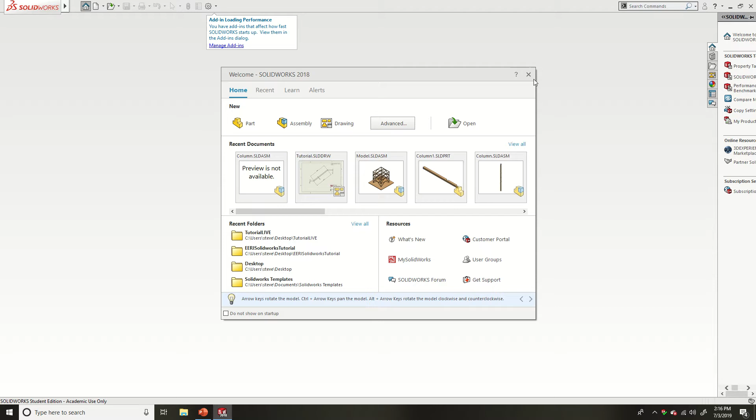So right now, I'm gonna put the column parts together and name it as one assembly. Later on, once you start putting the full model together, you can just call out that one assembly and throw it in, throw it in, throw it in.

So for this one, let's go ahead and close this because we have our template. You can either open it from the folder or open it from here. Alright, it's a template, it's gonna open up. You've got your IPS right here, inches pounds seconds, I believe.

Alright, so first off you gotta save it, save it for how you're gonna want it. So this is gonna be a column, we're gonna save it as column. File name is column. Make sure you go from assembly templates to assembly. Once you've done that, go ahead, click save.

There it is. One thing to know is that once you open an assembly, you want to start putting parts in, right? So what are we going to put? We're going to go up here, top left in the ribbon. The ribbon's going to have insert components.

You're going to have the option, either this open dialog box is going to open up, and if it doesn't, you can just click browse over here. We're going to go to our folders, correct folder, and open column 1. That column 1 was the bottom one. So we're just going to open that, and basically you can select where you want it.

So if I click in the center of the screen, it's going to throw it in there. One thing to note is that once you throw this part in, SolidWorks is actually going to fix it. So if I were to click this component and right click, it's actually fixed, meaning that if you want to move it, you can't.

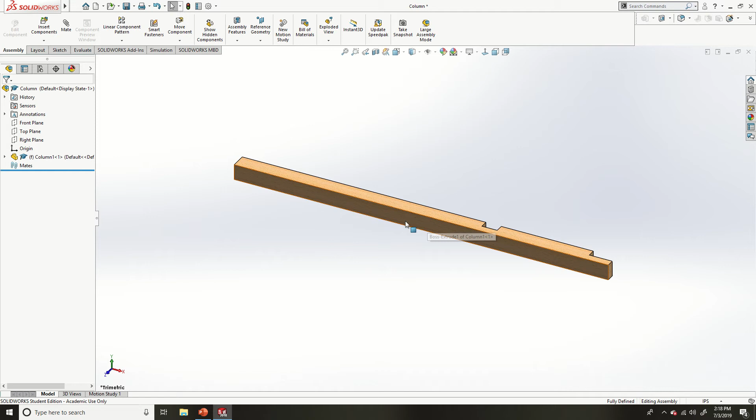So one thing to do, since it's fixed, is unfix it. But in this case, you actually want to make it float. So I'm going to click the component, right click, and go to float. And now that I've floated it, I can actually move this around.

So I want to position this in the space in such a way that it's easier for me to work with. In that case, I want it to be standing up, and I want these notches to be facing me so I can see them. So one way to do that is, let's go ahead and just click it.

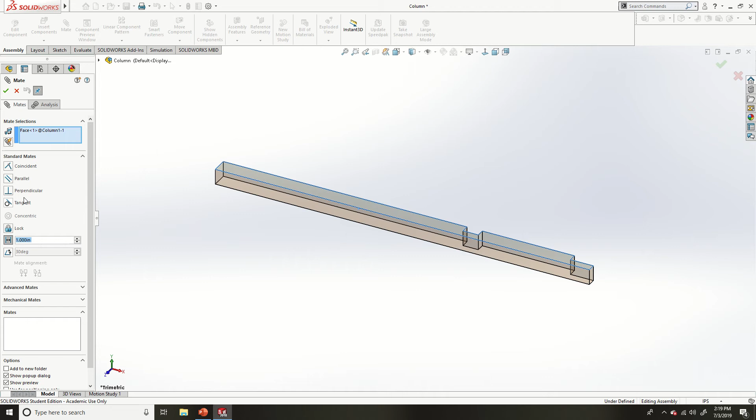How do you do this? You want to mate, that's what's known as in SolidWorks, it's called mate. So with your mate option, you basically gonna do coincident for the most part, or you could do a fixed one for a particular distance, parallel, perpendicular, tangent. For this one, we want to mate it to the right plane.

I'm gonna try to get this to stand up. Hopefully I can get it on the first shot. Alright, I did, but as you can see, I'm gonna press Control 7, ISO view — it's on the right plane, but it isn't in the way I like it.

So let's go back to our navigation pane, and I want to delete it. If I delete this mate, it's actually going to keep the same orientation it had previously with the mate, but it's just going to remove the rule. So it's going to be standing up. But I don't want it like that, so let's do a little trick.

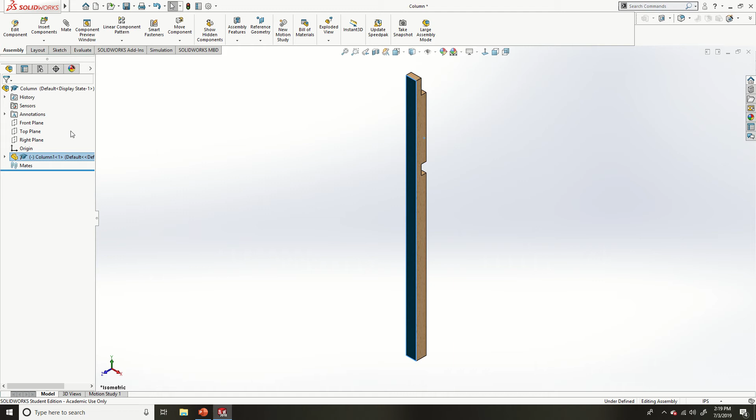Before I do that, let me make the bottom of this — I'm going to click that, and then control-click the top plane. See, SolidWorks recognizes that you want to do a mate, so it's actually going to leave you the option right here. This is actually the one for coincident. I'm going to mate it. So right there, let me show you this.

So there it is, it's being shown right here on the bottom. Here, just show, hide. So there's your top plane. It's right there and it's mated.

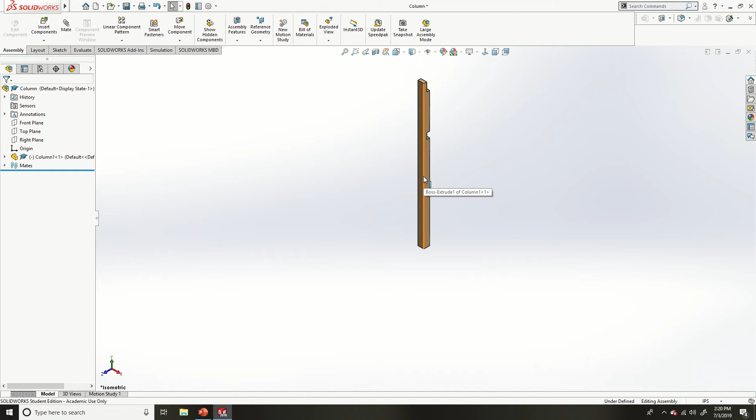But I want it to be facing me. So one way to do it, if you're going to rotate this, is pick this line right here, and this line will serve as an axis. I'm going to temporarily mate that to the right plane. Because this line is mated, it becomes an axis I can use as a rotation axis, so I can rotate it around the right plane, and now it's facing the way I want it.

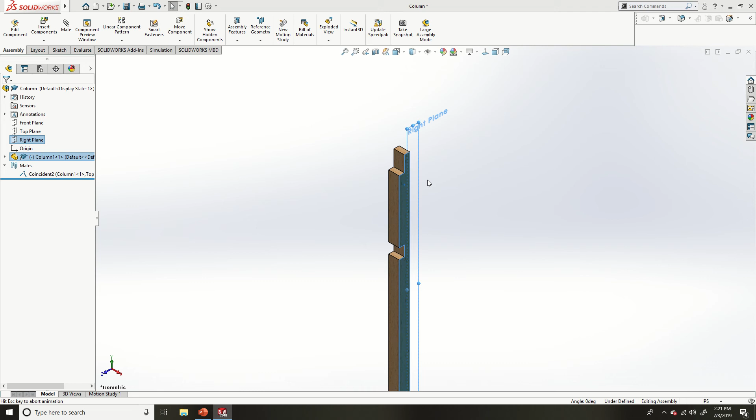I don't want that mate, I just used it for rotating, but I don't want it permanently. I could have just left it, but I'd rather mate it with the right plane for organizational structure. I want to mate it with the right plane, and I want this to be on the front, so mate it with the front plane.

So now it's actually there. Since I mated it with the top, front, and right planes, the origin is going to be right here, that's where the origin is at. Alright, so that's how that is. I'm just going to save it quickly, and there it is.

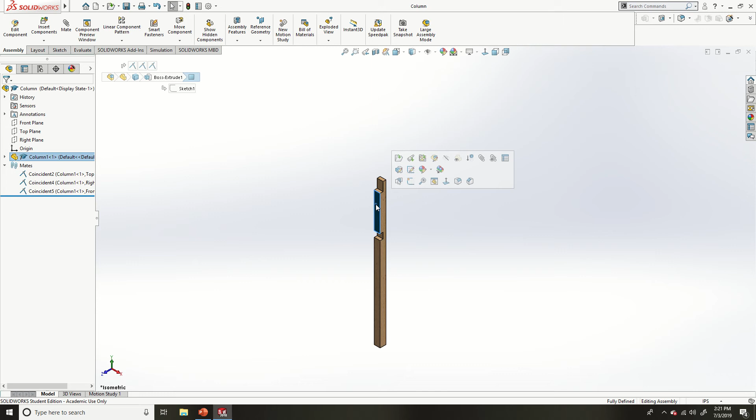Alright, so now it's at the position you want. I actually want to fix this, so when I throw in another part, I don't have multiple parts floating. Once I put in the next part, that part can float, but this part will stay fixed, so everything moves about this part since it's fixed.

So let's go ahead and insert the next component, column 2. I'm going to open, control, so I'm just going to throw it in there. So yeah, it's in here. Alright, but since this one is fixed, it's not going to move. If we right click, it's going to say float, meaning that one's been fixed.

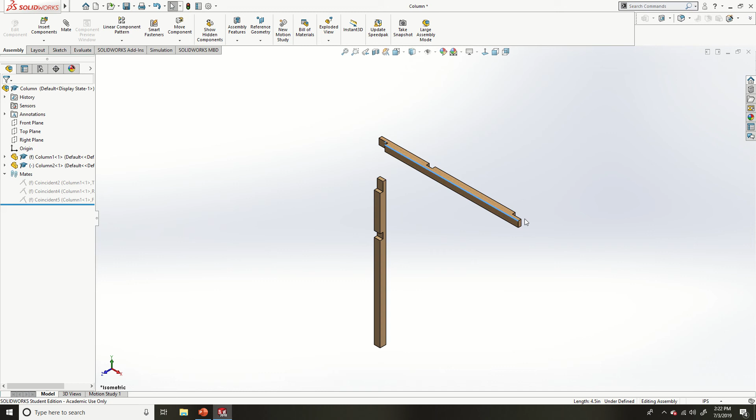But since this one's floating, if you right click it's going to offer you the option to fix it, but you don't want to do that. So let's go ahead, and if I'm looking at this correctly, this looks like it's about 3 inches. So this looks like the top part. I'm going to try and mate it with that and see if it rotates it.

Oh, it doesn't rotate it the way you want. Alright, it's fine, no problem. Let's just rotate it, so let's do that axis trick again to rotate it. So right now I'm just going to line these up, coincident these two, and then just rotate it. Clicking, and there it is.

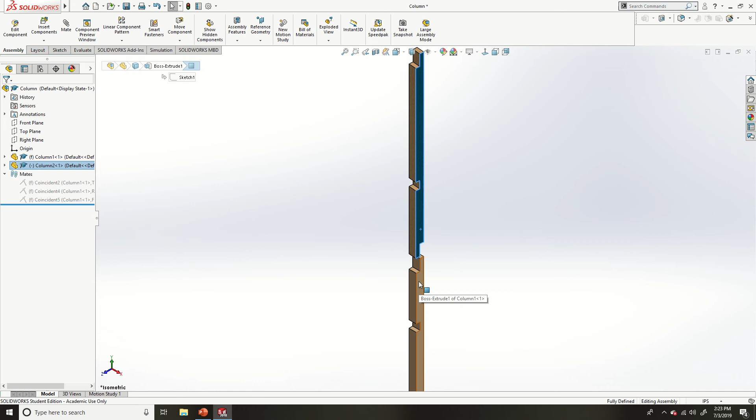It's been rotated, let's take that coincident off, you just use it to get these things together. So there's like two main ways you can mate these parts together. You could either just mate it by mating this face with this face, and then mating this face and this face. And so you can do it like that.

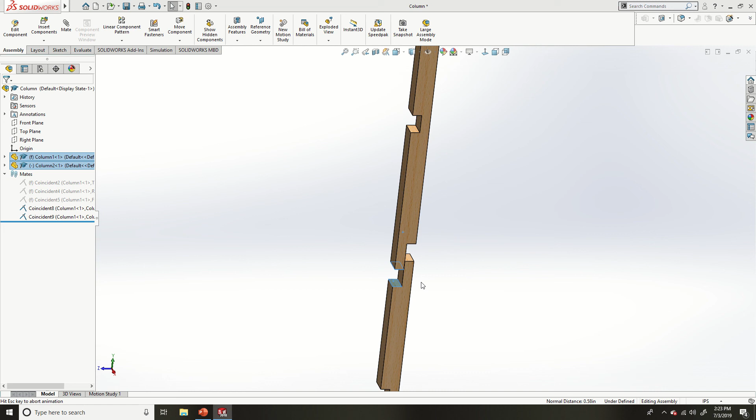You can do it by mating these two faces, and then you just need this face with this face right here. Either one, it could be this one, that one, doesn't matter, just make sure it's a correlating face. And click right, so it's going to be control, and there, it's mated. Control 7 for ISO.

So there it is, it's fixed, fully defined. Or you could also just delete everything and go about it a different way. You could literally just select this line and this line, coincident those two, and I believe, oh you just need one more, oh no, actually you need 2 more still. You could do it like that.

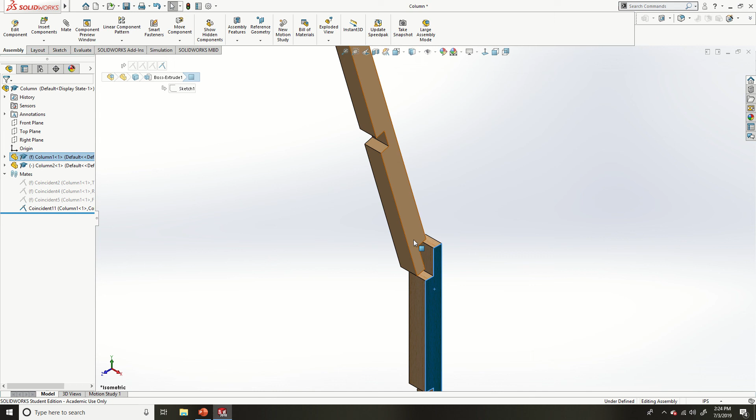We would just need to coincident this face and this face, and this face and this face, or you need to coincident this face and this face. But look, we could just go about those 2 lines, and I believe it's fully defined. See now, yeah, it doesn't move. I'm clicking and holding, that way, see if I can move it. You actually can't, so that means it's fine.

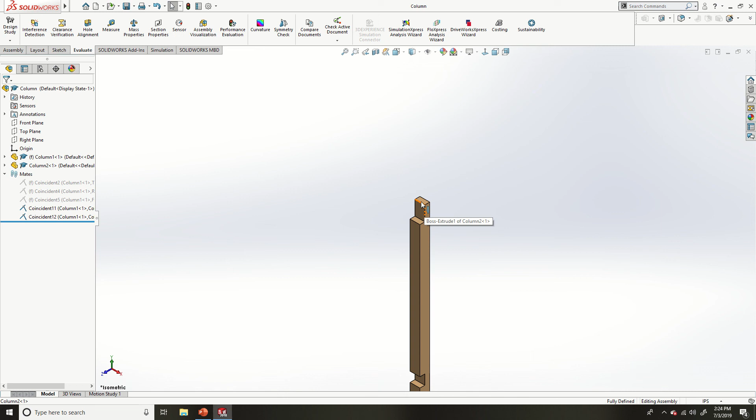Alright, just to double check, let's make sure I oriented these correctly. Since this should all be 3 inches away, you have the option of measuring this. So if we go to the ribbon, evaluate, measure, you could measure from this line to this line. It should be 3 inches. Distance is dy 3 inches.

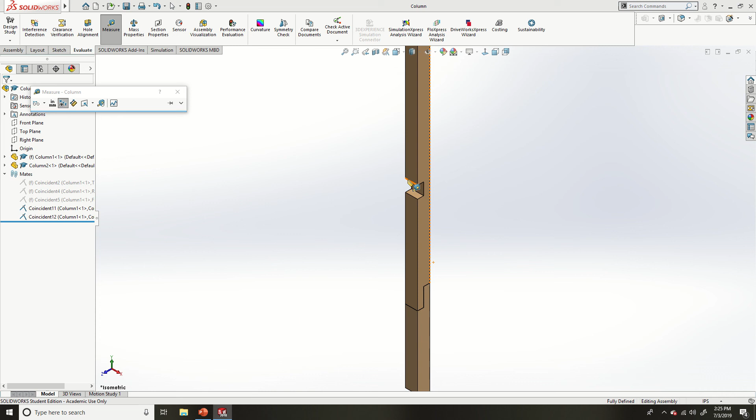This distance is kind of at an angle, it's like the hypotenuse of this very skinny right triangle, but if you just want it in the y-axis, it's 3 inches. Let's go ahead and measure another one. I press escape, but if you press enter, it'll follow the previous command. So let's go with that. Double check, 3 inches, 3 inches. Yes, 3 inches, alright cool.

So there it is, you just double check your column, control save. Alright, let's go and put it together now. Alright, let's see you in the next video.